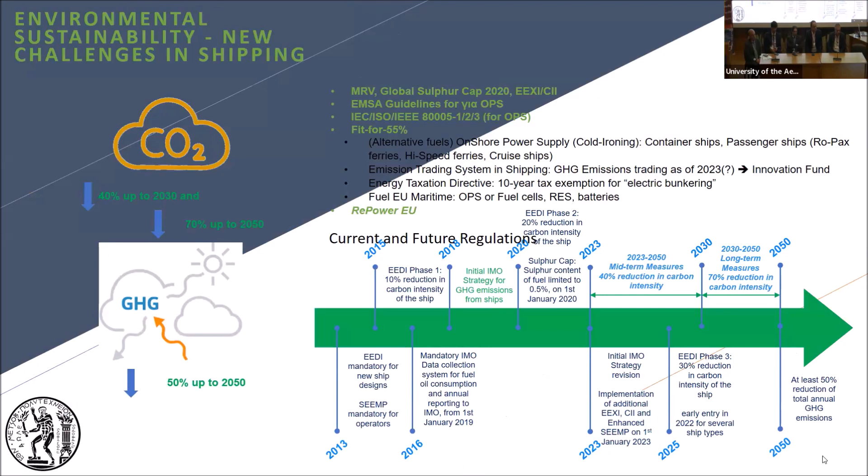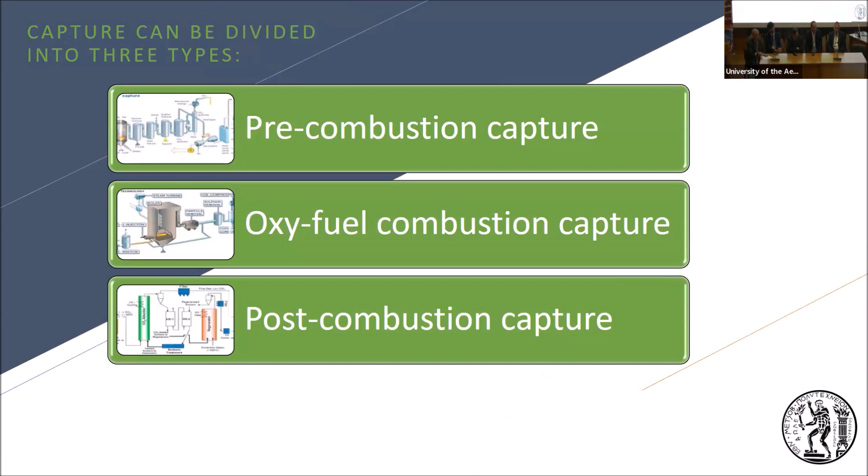Let's talk about carbon capture. There are basically three ways to use carbon capture in shipping and onshore: pre-combustion, during combustion with oxy-fuel combustion capture, and post-combustion capture.

I have a very analytic way of how it works. In pre-combustion, you essentially steam reform the fuel before using it. That needs air and water vapor. You steam reform it, separate CO2 from hydrogen, use hydrogen as fuel, and then store the CO2. This is the pre-combustion phase.

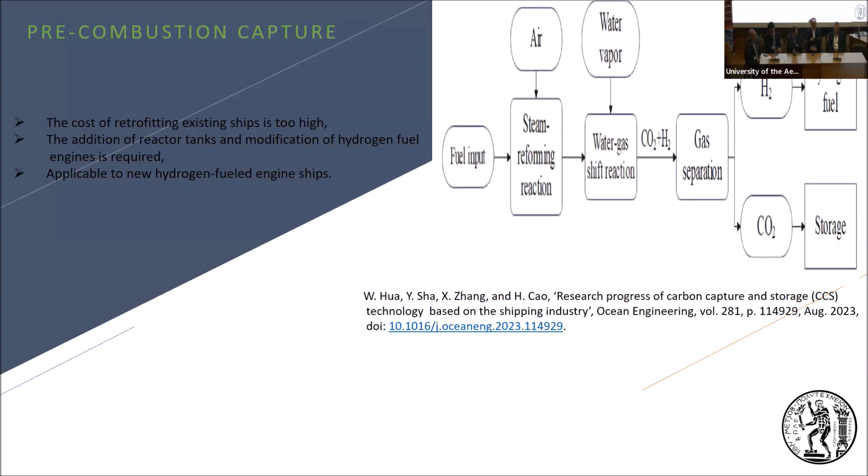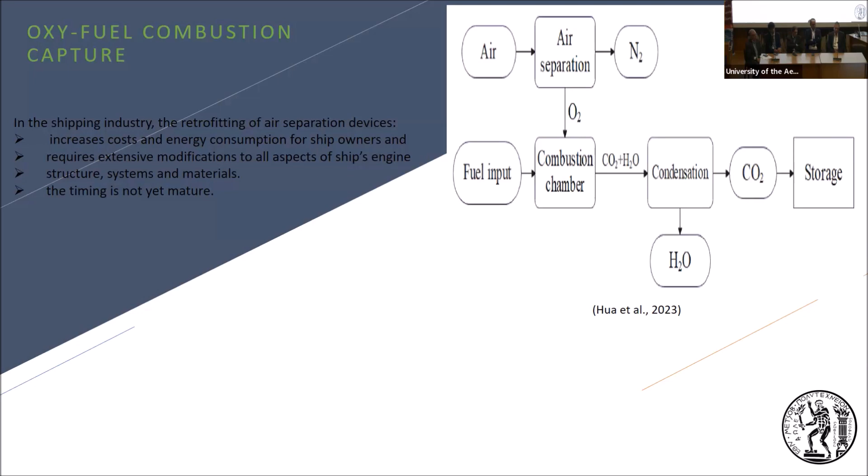During the combustion method, you use a mixture very rich in oxygen in the combustion chamber. You first have to separate nitrogen from oxygen, use oxygen in the combustion chamber, and then after combustion you use condensation to get out the water and store the CO2 somewhere on board.

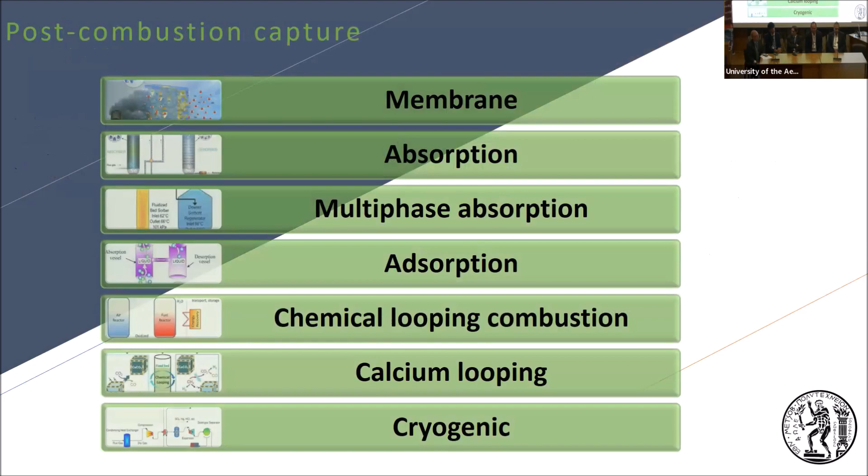The third way can be done technically with different technologies: membrane absorption, adsorption, multi-phase absorption, chemical looping combustion, calcium looping, and a cryogenic way. There are a lot of technologies, but only one can most probably be applied today.

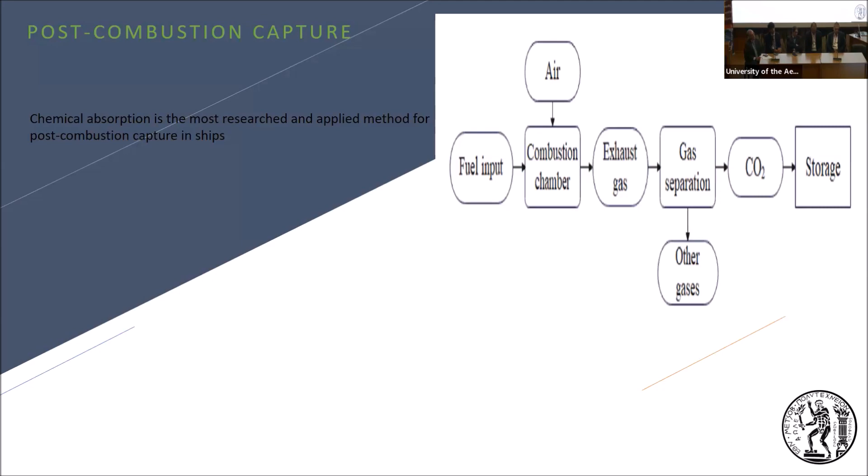So in this way, you first have the normal combustion in the engine, and then the exhaust gas goes through some separation from CO2. You keep the other gases and store the CO2. Of all the technologies, I have opted to see in a little more detail how the most promising one works for the time being.

In this case, the air goes into the engine. After the combustion, you take all the exhaust gas to an area where you cool it down, and put it into a place called an absorber. There you use amines, chemicals that take CO2 out of the exhaust gas. This then goes into a chamber where you separate the CO2 from the amines. The amines go back for reuse, and the CO2 goes to a place where you keep it - it's pure CO2. So this is how it works.

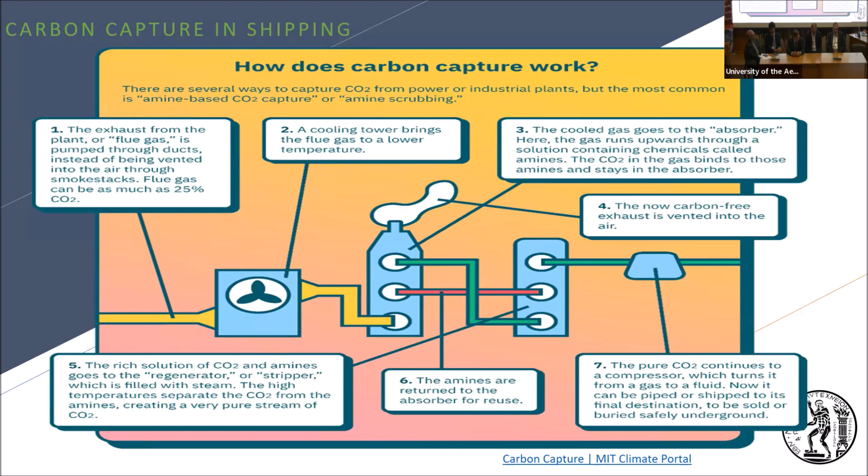Of course, we must know that carbon capture is a little bit like a Ponzi scheme. Since it is very expensive today, you spend a lot more energy capturing CO2 than the actual CO2 that you capture. This has to be addressed.

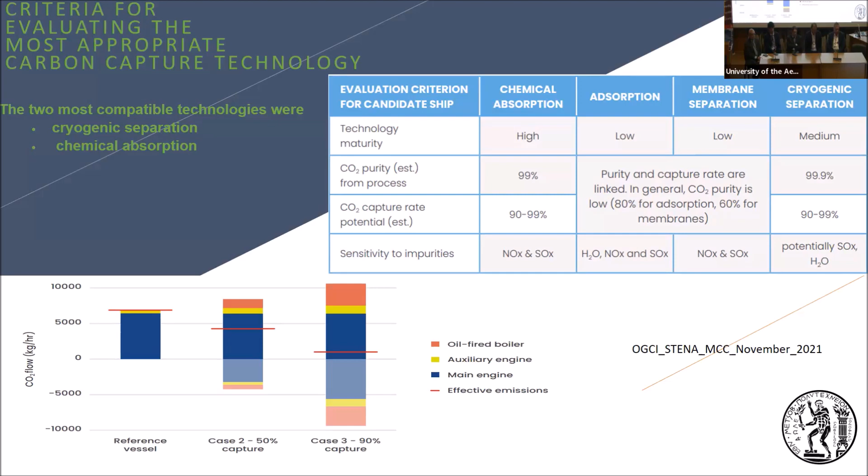Another important point is that carbon capture cannot operate on its own. You need to have a whole supply chain where you take the CO2 from the ship onshore, not only from ships, because it's not sustainable only from ships. You have to transport it somewhere and store it, or use it in some other way.

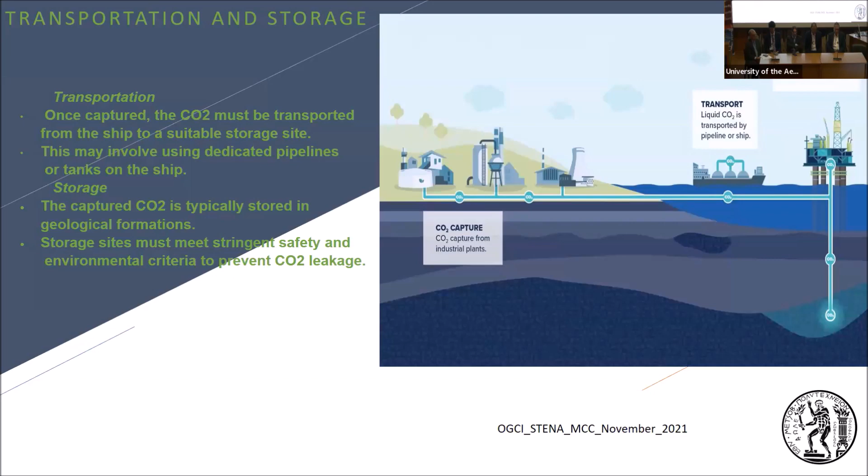You have to drive it to hubs like a large port. You have to also take the CO2 stored on board ships there, and then you need to organize the supply chain with the ship to the end case.

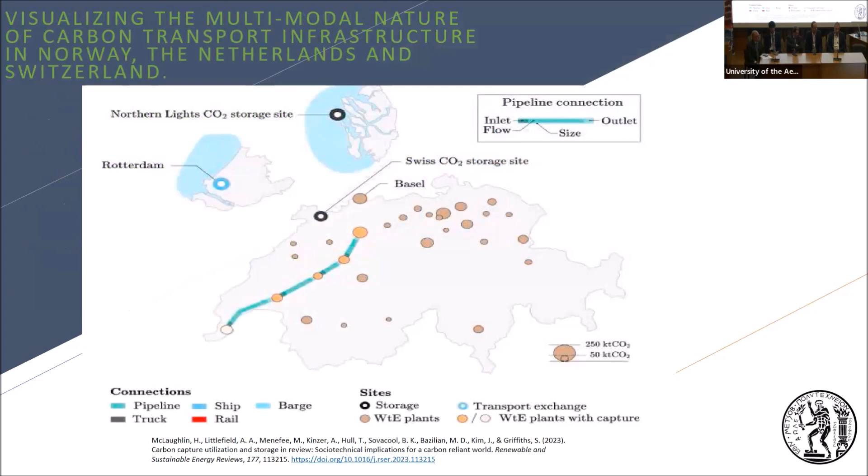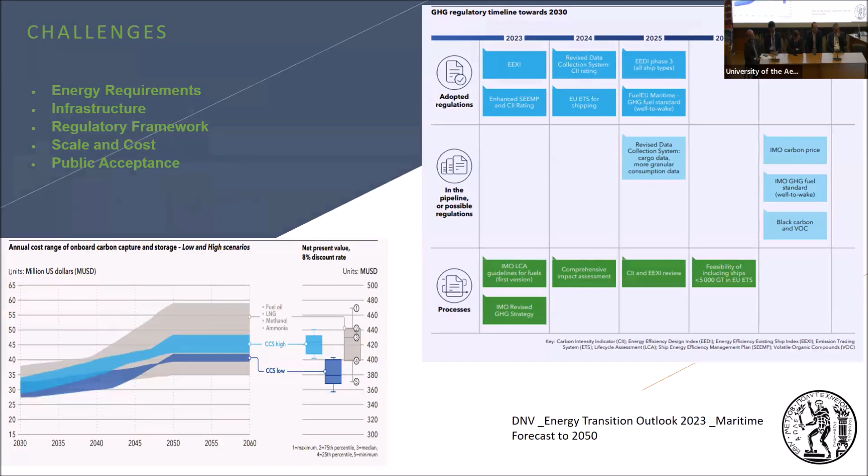What is very important to know is that CO2 capture has quite some cost in its application. It's very expensive. You can see it on the left graph, where you see how expensive carbon capture can become. Studies show that it is only viable if the payback time is less than 5 years. After that, it's assumed that other fuels will be available, in which case those who invest in CCS will not be able to profit from their investment. So it's a big issue to be discussed.

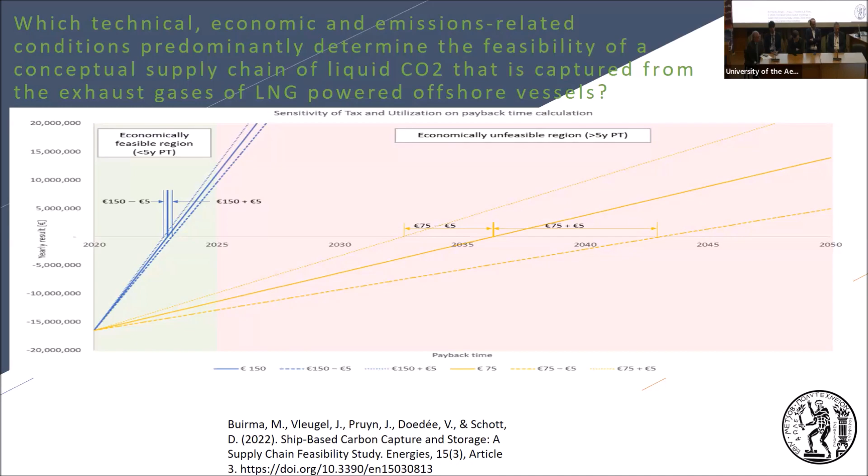This is all for your consideration. I think carbon capture is one technology that can be used immediately. It's very expensive still—maybe some research will drop its cost—but it's still a very expensive technology, and it is only a temporary measure. But it is one technology that can give life to fuels like LNG or methanol that are not green yet.

But we have to always calculate the life cycle cost, and the shipping community, I think, should press a lot towards the calculation of the life cycle cost of all these technologies, because sometimes the entire cost of capturing CO2, or avoiding the use of CO2, is more expensive or more carbon generating than the actual use. So this is very important. Thank you very much.